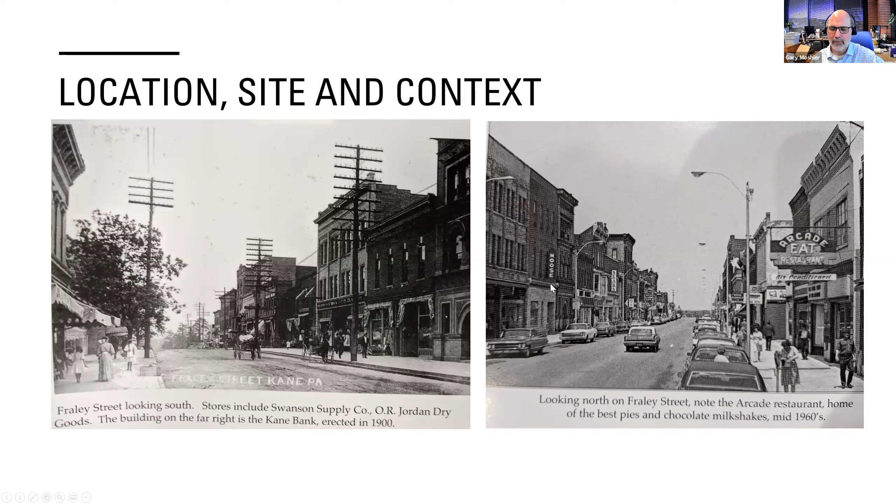And then this shot looking the other direction from the 60s. You can see at that point it's a 3-story building with kind of the nondescript facade. Already had the permastone added on and was the Moose Lodge at that point. And here is sort of an aerial shot.

Some of the existing conditions, I think Norm probably already showed you these. These were his photos. You can see the masonry was in pretty rough shape when we started. Also, the wood floor: the old structure had a bearing wall going up the center, so it was basically a 2-span structure with full 2x12, 3x12 joists spanning roughly 20 feet to the middle. It's roughly a 40-foot wide building.

Needless to say, that didn't quite meet our current codes for floor loading. So one of the things we did is we turned it into a 3-span building. We added 2 lines of columns and beams going front to back to shorten the spans up and replace damaged wood that occurred over the ages from people cutting things up, as well as water and other damages. So you can see here's what the inside of the building looked like early on.

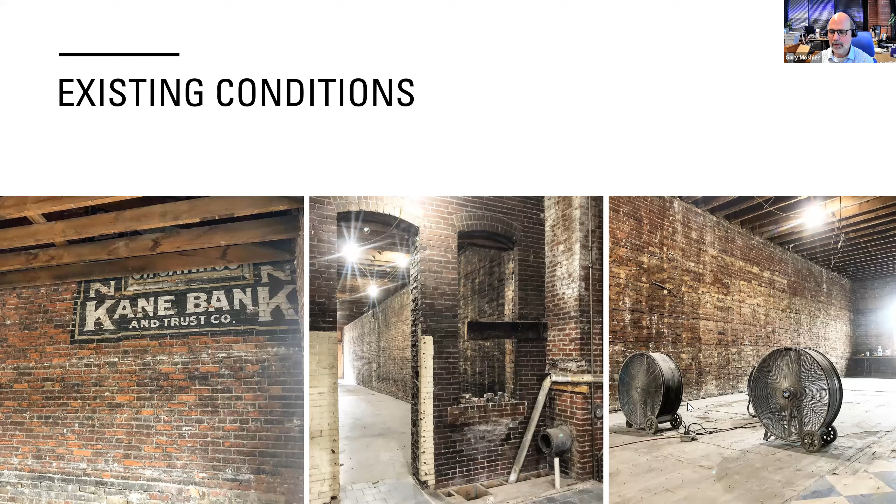This Kane Bank and Trust sign is up on the 3rd floor on the side of the building from before the 3rd floor was added. Down on the 1st floor, this was the back of the original building, and you can see they added about 20 feet behind. And then I think this other photo is on the 2nd floor, just showing some of the brick walls that were there on the party wall. Norm's going to get into some of that later as far as what we did with the brick walls.

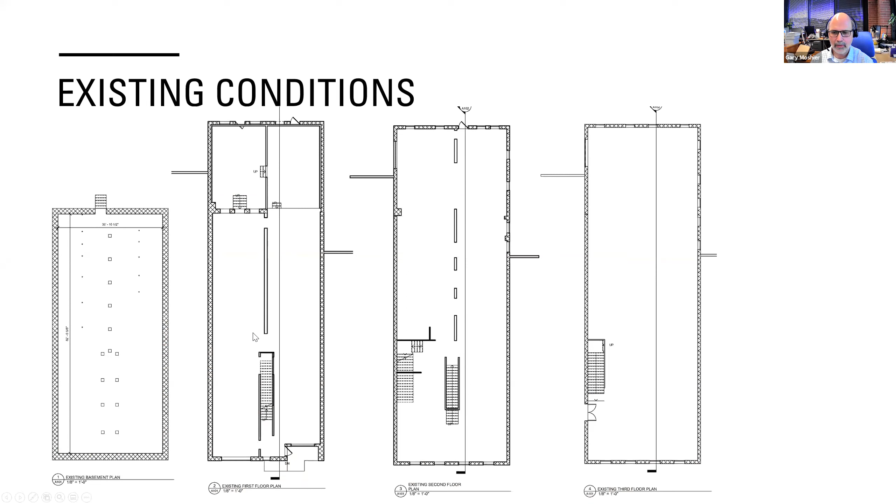So you can see here existing conditions. We have the party wall down the middle, stair going up the center, and the basement was just the original footprint. Fairly low basement. We're really just using it for some mechanical work, and we'll talk a bit more about the envelope strategy here in a bit. And you can see pretty straightforward sections and elevations in the existing.

So our design parameters for the new usage was basically to come in, do retail on the first floor, not a restaurant. We were fairly clear that we did not want to get into hoods and water usage and so forth with a restaurant. There's also enough other buildings with restaurants on Fraley Street. We didn't really need to get into that.

The second floor would be multi-tenant office space. And the third floor would be a conference room, classrooms, essentially operated by West Penn Power Sustainable Energy Fund for the community benefit. So it becomes a nice big meeting space since we have nice big clear spans.

Rest of the mission statement, we want to be a good neighbor. We want to set the example, as they were talking in the video. We want to demonstrate how to do this and what can be done in transforming the market. We wanted to share an elevator and a stair with the building to the south. We call the Laughing Owl Press. That's the name of the business that's in there. They did not have an elevator and they were short a stair to be able to use their floor plate.

So we figured if we could double up, use some of the sliver building ideas that have been pioneered here in Pittsburgh and sort of take those up there. So we've been working with a local code administrator to do the administrative variances to be able to do that. We wanted to use local and regional materials. We also wanted to salvage and reuse whatever we could.

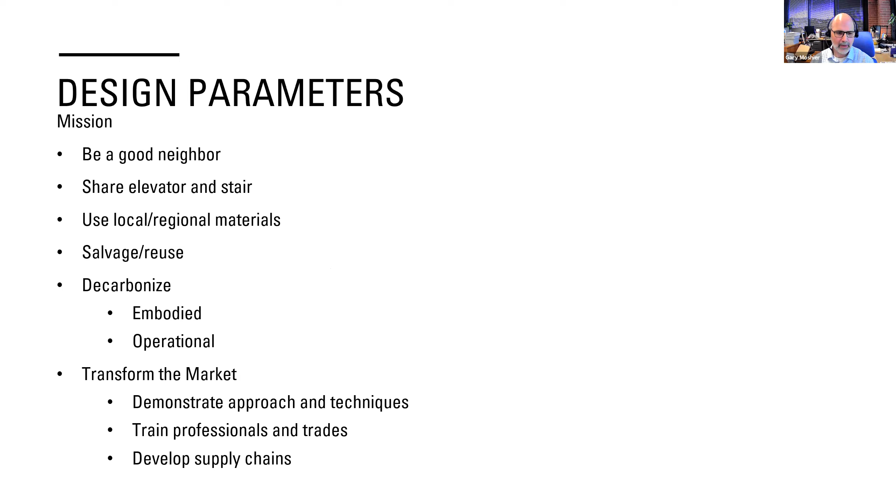Generally wanted to decarbonize through both using the embodied energy of the existing building as well as reducing our operational energy usage. And then also transform the market. We wanted to demonstrate the passive house approach, passive house techniques. We wanted to train the professionals in the trades up in that area and also develop some of the supply chains for the materials.

And further, we wanted to follow the PA Wilds design guide. As Mayor Brandy was saying, it's part of the PA Wilds, and they do have a design guide to help promote renovation and redevelopment of the downtowns that are in the PA Wilds area. And essentially the parts that we're working with is using the context of massing, materials and historic imagery, and then also use of local materials.

Joel is a geologist by training and pretty much mandated from the get-go that we use stone in some big way. So we're using stone actually from Russell Quarry in Grampian. And then to maximize daylight and views, since we are a sliver building east-west, the building's 40 feet wide and about 120 feet deep. And so therefore trying to get the daylight into the narrow ends is one of our key goals here.

As far as the passive house, at very minimum, we were tasked with hitting the passive house EnerPHit performance. And these are the parameters for that: 1 air change per hour at 50 pascals, 9.75 kBTUs per square foot per year space heating, 4.75 kBTUs per square foot per year for cooling.

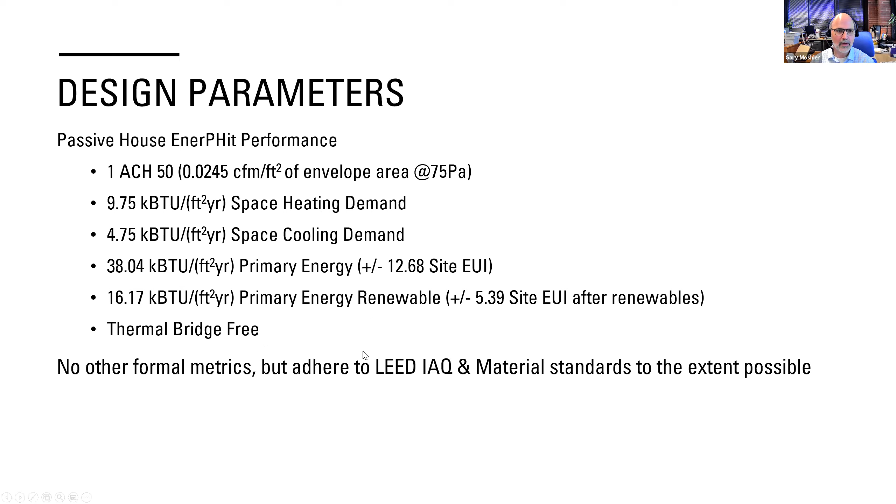We didn't really have any other formal metrics or systems that we're going after. We talked about doing possibly LEED, possibly WELL. We're sort of cherry picking various aspects of those. Generally, we're adhering with the LEED IAQ and material standards to the extent that we can, just to have a good, healthy building and to reuse the building, reuse materials, and use local materials.

Timeline started back in June of '19 when they bought the building. They spent the first couple of months working with InScale to document the building, develop some conceptual designs, sort of figure out what direction they wanted to go.

And then in October of 2019, the board, headed by Rob Hoskin at the time, decided to go for a passive house, and they engaged us and Envinity to help them get there. We started our PHPP modeling towards the end of '19. We basically set a deadline for mid-April to get our core and shell CDs out.

And then, of course, the work from home order hit us just before our DD deadline. So we kind of did a shift in what we were doing. We were able to issue a masonry repair and stabilization package in May, and then full-ish core and shell documents were issued in June of 20.

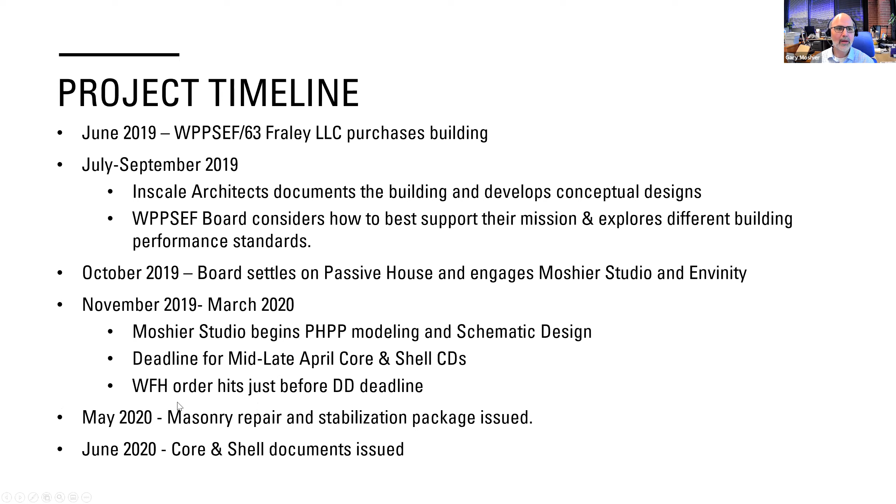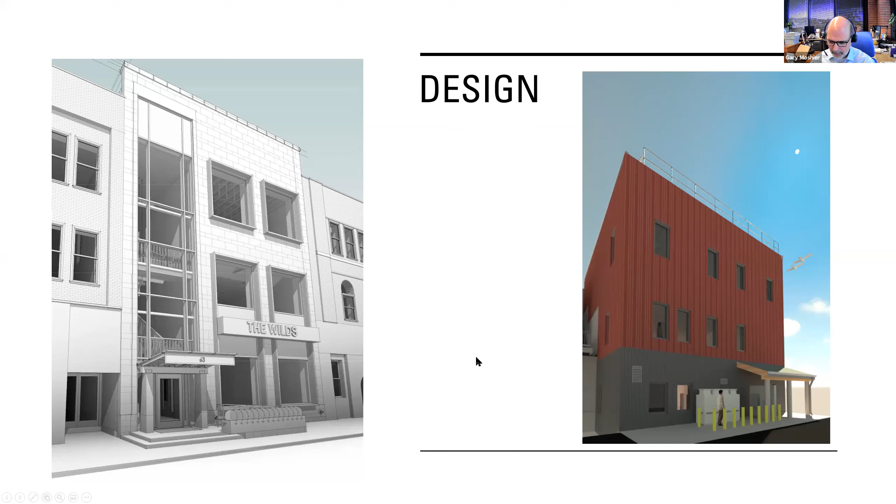Plan-wise, you can see here we're doing our core essentially along the south wall of the building. So the main entrance is here. We work back, elevator, mechanical, a shaft that goes all the way up through the building, stacked toilet rooms, some service space here. This varies between electrical, kitchenette, and storage on the various floors, and then our back stair here. The alley is about 3 feet higher than Fraley Street, so we had to make up that difference in the stair to get out the back.

You can see here that this is the Laughing Owl Press building. We're poking through the party wall to provide access to the stair and the elevator. And then what that does is that gives us a nice wide 24-foot by 115 swath of space. Get good daylight penetration from the east with the big windows. Pretty good daylight on the back. These were the existing openings, plus being on the west side, we were trying to not get huge openings on the back just to prevent some of the overheating. But on the front, we didn't feel too badly about bringing in some of the cooler morning light. So you can see that same idea just sort of goes all the way up through the building.

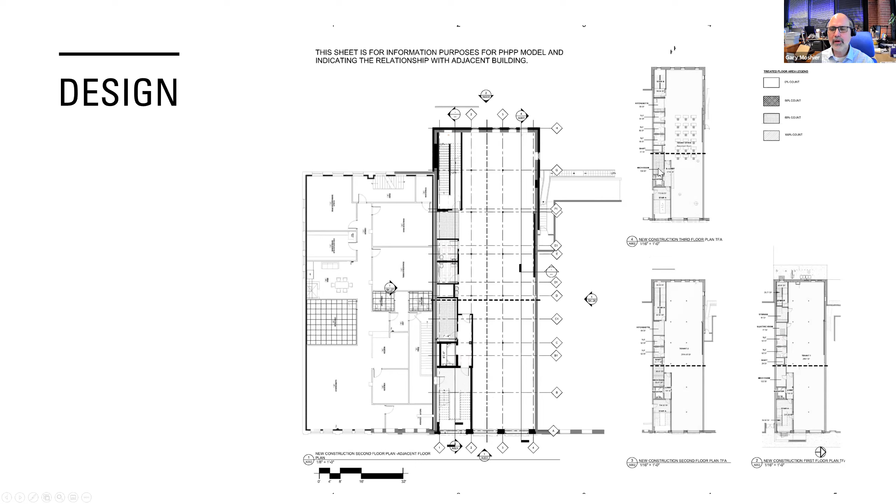Section wise, we peeled off the old roof, and Norm will get into some of the mechanics of that later. We had these 18-inch deep steel beams, basically 16 on center, that were marching back along the third floor, and we set up a series of trusses to give us a monoslope roof to the back. Got rid of an old bad drain system, so we're basically keeping all the water outside the building. We've got a huge gutter on the backside, and this gives us a nice high space.

The other thing that we've done by popping the roof up, we first of all got a parapet, so we had a little more distinction from the neighbors instead of having the same height. And by bringing our roof up, we were able to extend our parapet around and cap over top of the party wall, giving ourselves a good air barrier and also a good thermal bridge free. Actually, we have a negative thermal bridge, a negative psi value all along that edge. Our roof is our largest exposed exterior surface, so we really wanted to get it right, get it complete, and get those big long edges covered well.

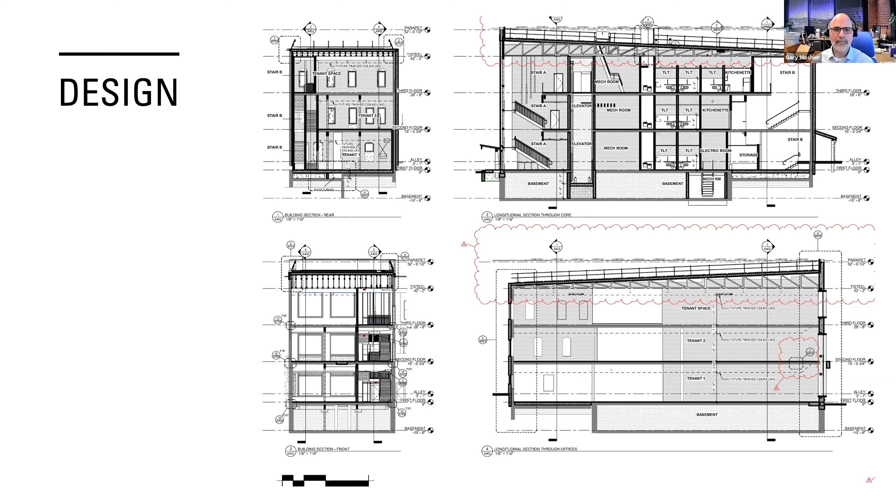And Norm's got some good photos he's going to share later with the construction. And then here's the renovation. Of course, here's our stone facade. We've got a little stone framework around the curtain wall, and then on the back side, we've got our ribbed metal cladding system.

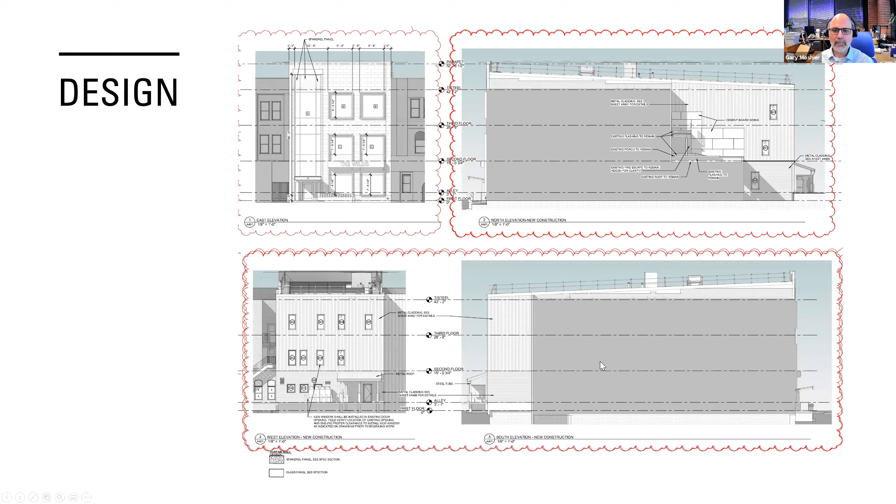The roof, in addition to being our largest surface, is also a power plant. We've got 90-some 430 watt PV panels planned for there. They may actually be closer to 500 by the time we actually get installed because the technology keeps advancing. We also have our energy recovery ventilator sitting on the roof, and we have a roof hatch so that we can come up and maintain everything and actually, you know, show it off a little bit if people want to venture up the ship's ladder to the roof.

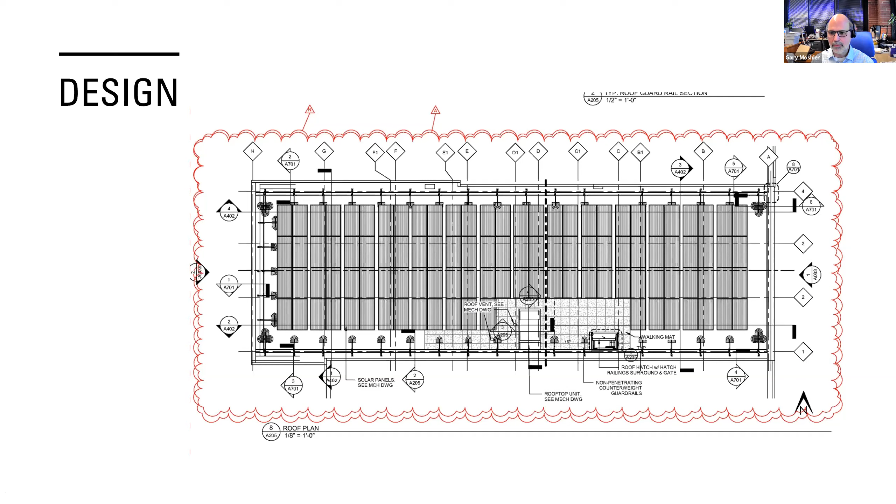So basic design elements, we had new roof structure that extends over the party walls. We used a fluid applied air barrier on the inside of the walls. And Norm's got some good photos of that he'll share with us. The new front wall is completely insulated. In addition to the 6 inches of continuous, we have about another foot of rock wool in various stud cavity spaces that make up the front wall and that work within the structural frame.

We have also on the interior, wherever we transition from party wall to clad wall, we've had to do some transitional areas of overlapping insulation on the inside and at the corners to get rid of our thermal bridges at the corners. And then at the bottom, the first floor, we've actually created a thermal envelope at the first floor level. So the basement is outside our treated floor area.

We've basically got on the floor surface, we've got the old wood decking, under that, blown in fiberglass insulation with an additional air barrier below that, and then we've got Durock on the bottom, providing a fire separation to the basement. As I said, the triple glazed curtain wall on the front is a Raico. On the back, we're using Ventana, made in Export, PA, triple glazed UPVC windows, and then we've got the PV on the roof.

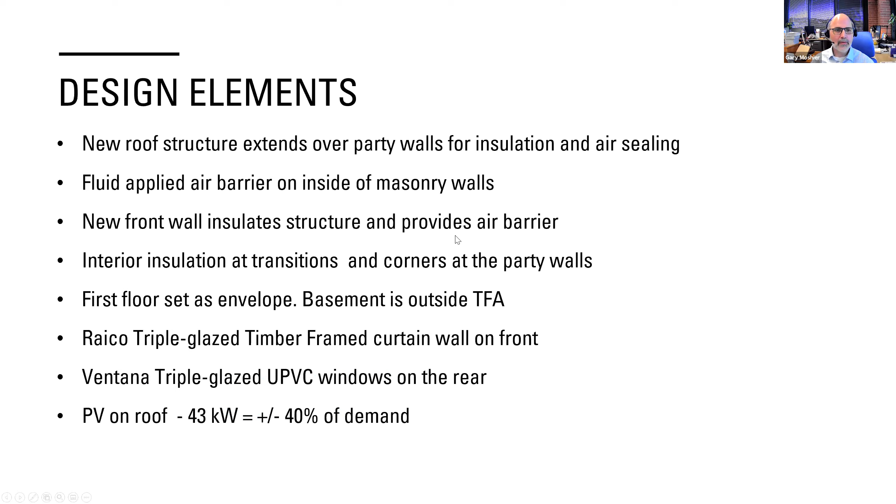So is that right? Yeah. Okay.

So where are we? In summary, right now against Passive House, our criteria is 9.51, but you can see we're at 3.16, which is actually under the 4.75 space heating demand for Passive House Classic. And similarly for the space cooling, our space cooling is 4.75, which is the same as Passive House Classic, and we're well under that. Our air tightness right now, we're carrying 1 air change per hour as our factor, just because we're allowed to under EnerPHit.

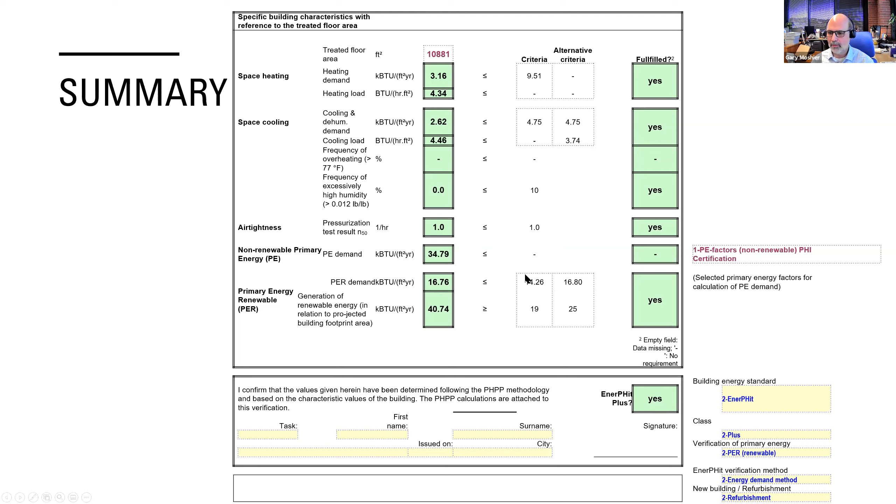But if we can get that under 0.6, which Norm will talk about a little bit later, then we're in good shape for Passive House Classic. And similarly, our primary energy goal is well in hand, and that number doesn't change much actually when we go to Passive House Classic. So we're actually in very good shape to hit true Passive House Classic and not just EnerPHit.

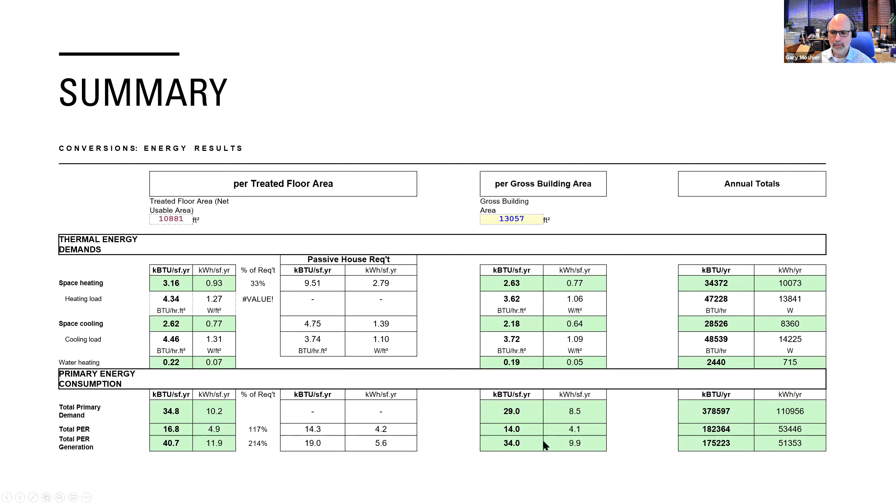So in summary, we're on track with our PHPP. We're on track for hitting Passive House Classic, or actually Passive House Plus, and we're still projecting substantial completion at least for the first tenant sometime this fall, and possibly for the full building after that. So I will turn it back over to Norm and let him pick up where he was.

All right, thanks, Gary. I'm gonna share. Okay, so we're back to where I left off briefly. I'm gonna get into a really quick review here of the existing conditions that we started with.

So, as Gary mentioned, we had approximately 12,000 square feet of floor space over this 3-story building, bounded on the north and south sides with shared party walls, and the east and west facades are and were 3-wythe brick. Wood floors, roof assemblies bearing mainly on the party walls, but with some point loads on the front and rear facade elevations.

And we talked a little bit about the sequence of the original construction and the challenges that presented for us. So we started out as a 2-story building. Our neighbors went up and they built 3-story buildings with their 3rd stories on top of our parapet walls. And then 15, 20 years later, our building came back, added a 3rd story, doing the same thing. They dropped these big 18-inch steel I-beams into the neighboring buildings and put a roof on it.

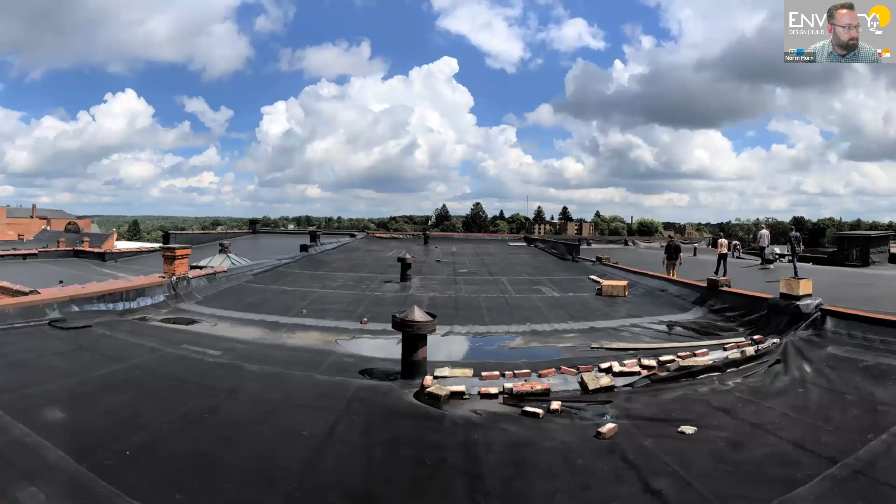As probably most of you remember, Pennsylvania closed construction for 9 weeks at the end of March last year. And other businesses were forced to learn how to work remotely with no advance notice. So things got difficult quickly. We started to reopen awkwardly in May, and by the time Gary's office had gotten core and shell drawings done, we got a permit issued, contracts lined up, materials secured, we had a really tight window to get this done, starting in August, and trying to get both of those assemblies completely replaced and dried in by mid-October, when snow is a very real possibility in this part of the state. So we came up with a way to work on these assemblies concurrently.

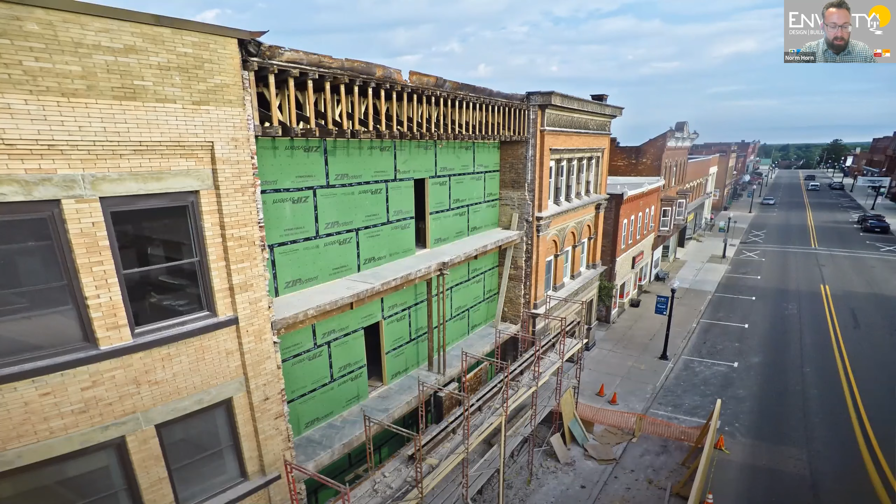Here you can see a small crew of masons dropped this facade in just a couple of days. And we had some temporary support and weather protection on the inside here. And once they got that down to the sidewalk, they just kept going and went into this 2-foot thick sandstone foundation wall and set new piers that our new facade structure would sit on.

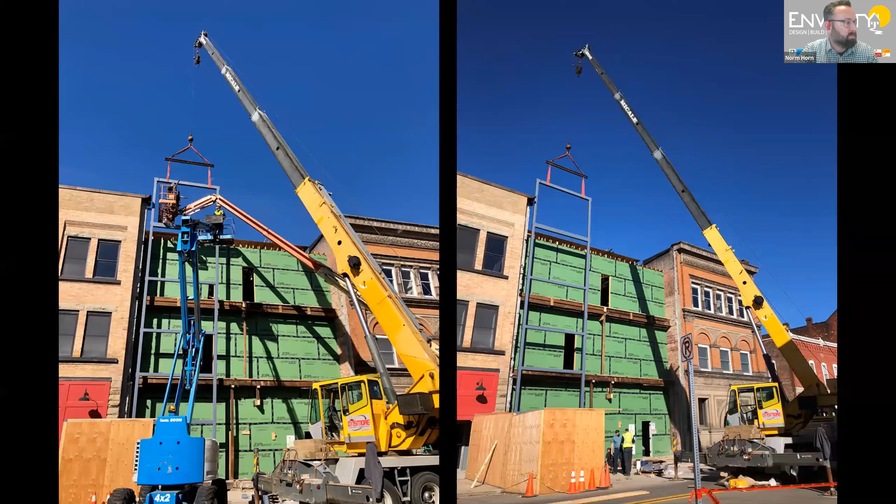So we used a local steel fab shop who really blew us all away with the level of detail and quality of work that they delivered, on top of having to navigate borough approvals and I don't know how many PennDOT permits to transport the steel, and then shut down Fraley Street, which is a state route and the main street through town. So we had the street shut down for a day and a half, and that allowed them to set these 2 58-foot towers. They did them in one piece, dropped them into place.

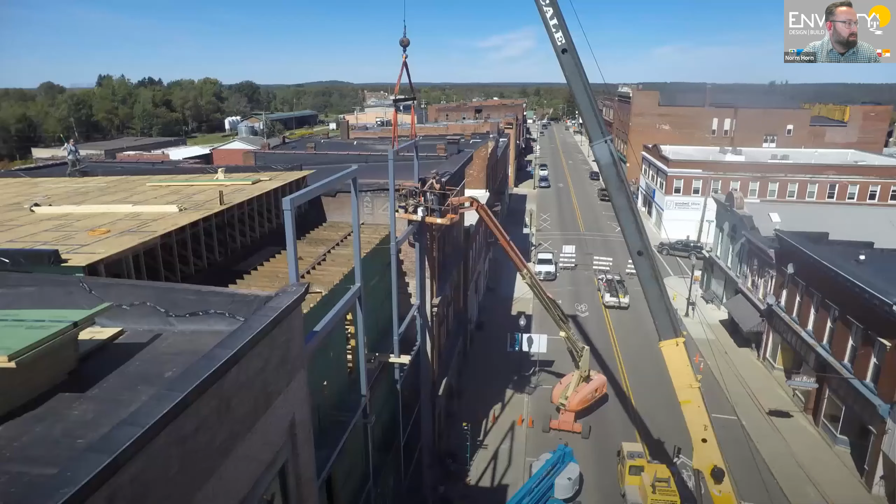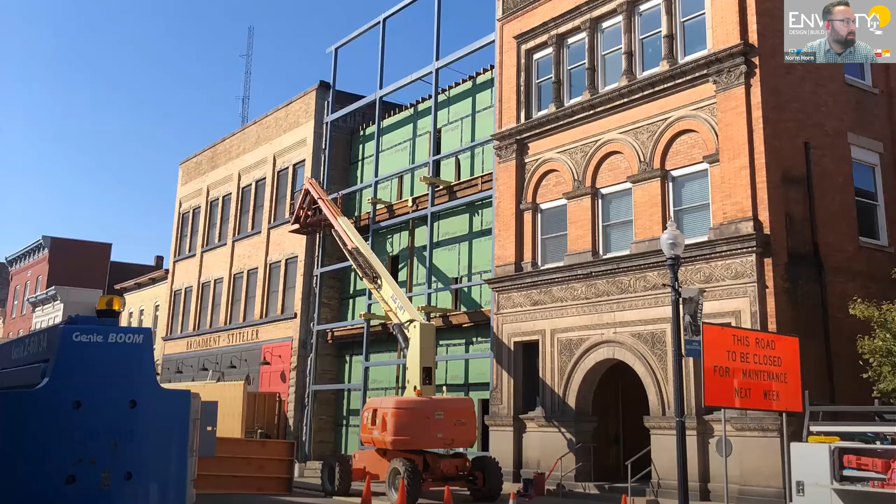You can see the second one going in, and then they connected them with a few beams right down the middle to complete that structure. Here it is at the end of the day. They had the whole thing up and largely tied into the neighboring buildings and tied into our building.

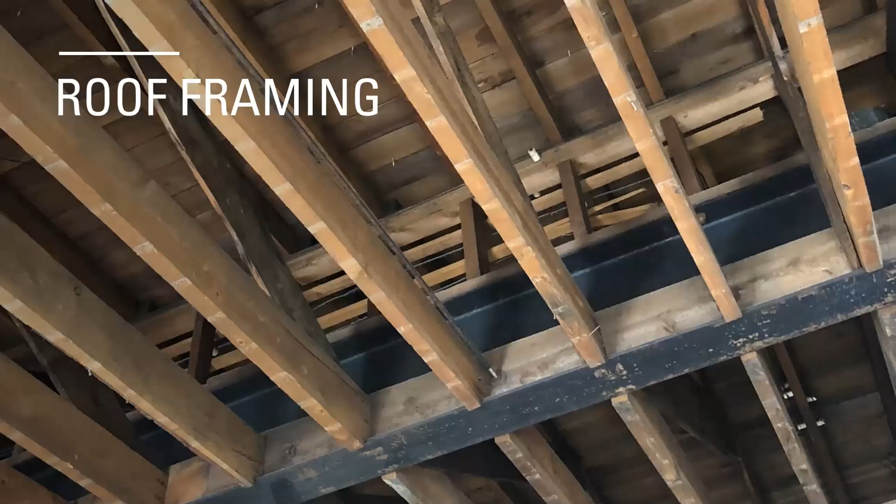So while that was being fabricated, the roof structure was being replaced section by section. The steel I-beams are roughly 16 feet on center. So that let us take out the roof in 16-foot chunks and just sort of march down the length of the building. As we said earlier, the 3rd floor was a pop-up addition supported with those beams. And the roof assembly and how it connects to the walls is where the discussion of air and thermal control layers really starts to get interesting.

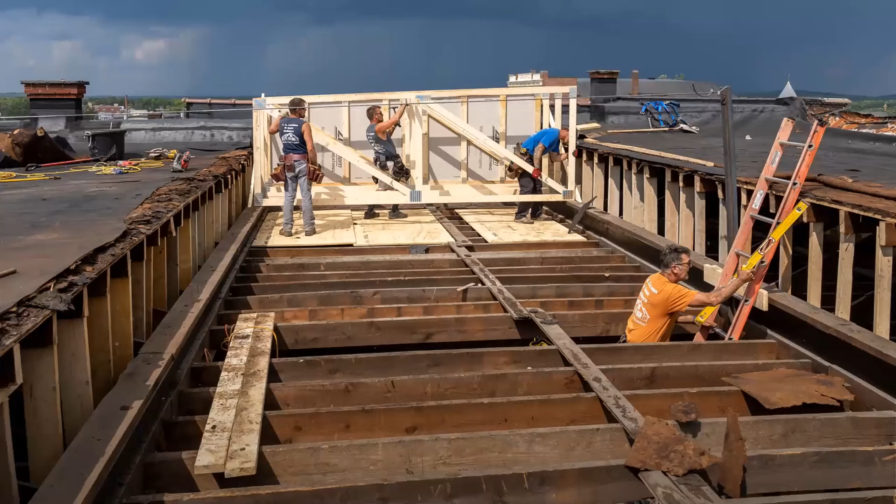We wanted to use the roof deck as the air barrier, and intended to keep as much, if not all, of our roof insulation outboard of that structure for solid continuous insulation. So we removed the rafters and the little stud walls on top of the beams and replaced them with open web trusses to span the roughly 14, 16 feet between. So here we are. We started one bay back from the front, and then took off the front section last.

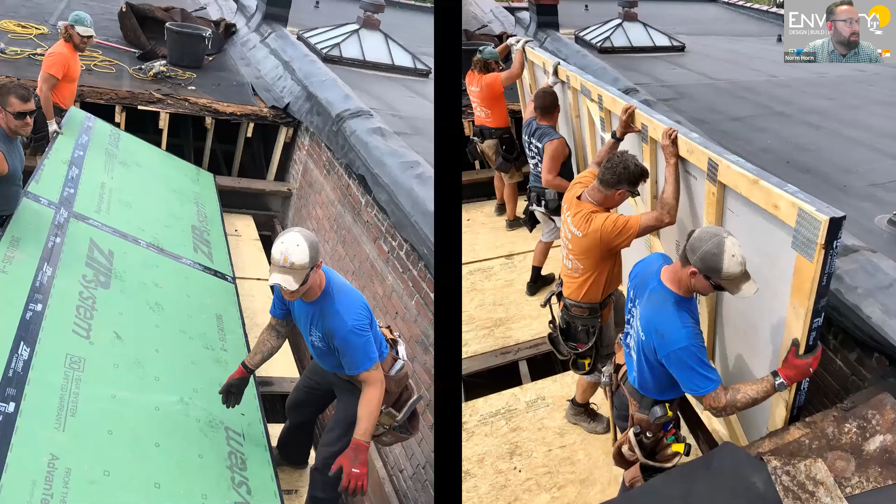So our gable end trusses were sheathed with ZIP R sheathing, which gave us an air barrier and a layer of R9 polyiso insulation bonded to that ZIP sheathing in one panel. And we taped the seams and the perimeter of each truss from the outside as they went in, as well as then taping them to each other. And that gave us a way to jump our air barrier from the outside around the parapet and down into the inside of the building. We connect that later when we pick up the air barrier with our inside masonry walls.

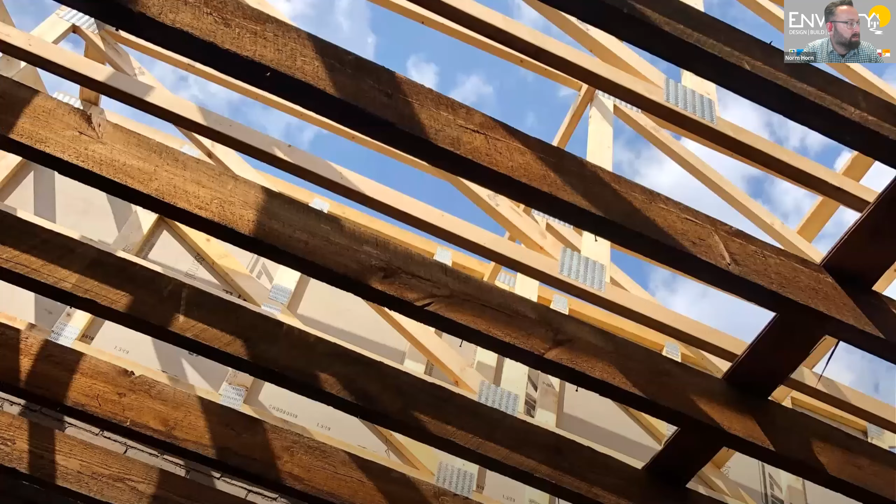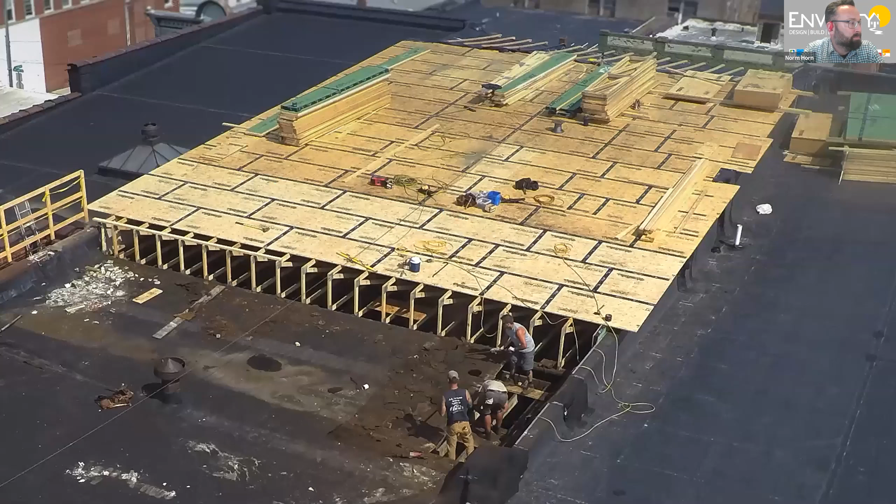So here we are after a fresh set of trusses on top of these 2x8s that basically just held up a plaster ceiling. And these are the ones that we salvaged, several hundred of these. Hopefully we can use them in the rebuilt structure. So here we are after probably about the first 4 sections, looking from the back to the front of the building. And usually it was about a day, day and a half to get a section torn off, and then about 3 or 4 hours to set the new trusses.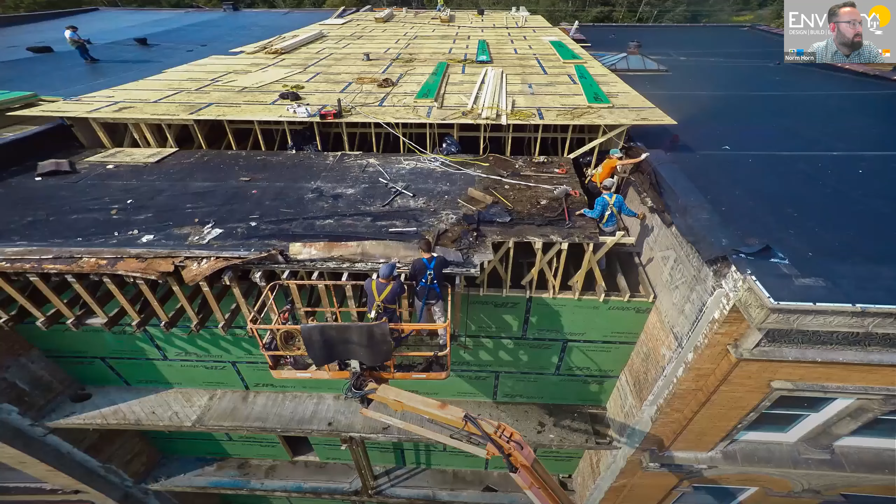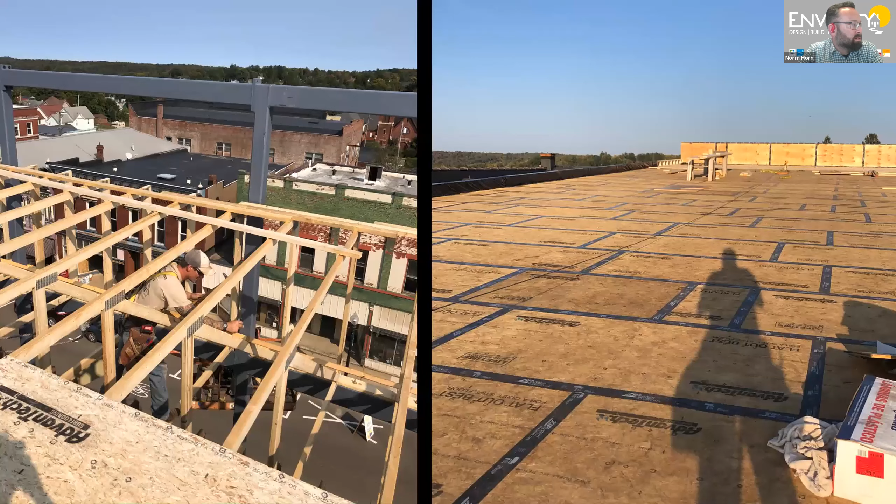And here we are. This is the day right before we set that steel structure. We had a good weather window and an opportunity to take this last bit off and have it ready for eventually tying into the steel. And then here we are with a complete roof deck and air barrier. So once that was done, we were able to turn our attention to roof insulation and the membrane.

So we went with a white TPO membrane with the thought that the extra reflectivity would benefit our solar array, which is currently scheduled to be 102 435-watt LG bifacial panels. Those are modeled to generate about 51,000 kilowatt hours per year. And Gary was able to work the PHPP energy model to give us a continuous 8-inch layer of polyiso across the roof deck without needing any additional insulation inside the building.

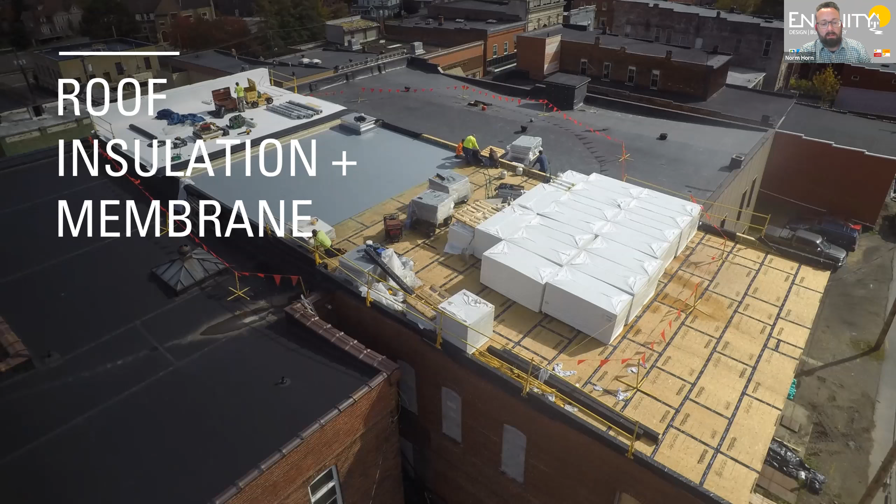These are some of my favorite construction nerd photos that really show how this roof assembly went together. So each layer, from the air vapor barrier, two layers of 4-inch polyiso, some tapered polyiso at the edge, a cover board, everything we adhered with CAV-GRIP instead of using any mechanical penetrations, because we really needed to avoid that if we're using the roof as the air barrier.

It's kind of hard to see in some of these photos, but we actually flew the roof deck long over the parapet walls. See, this shows up in the CD set here. And what that allowed us to do was turn several layers of insulation down on top of the parapets and create a continuous thermal lid over the building.

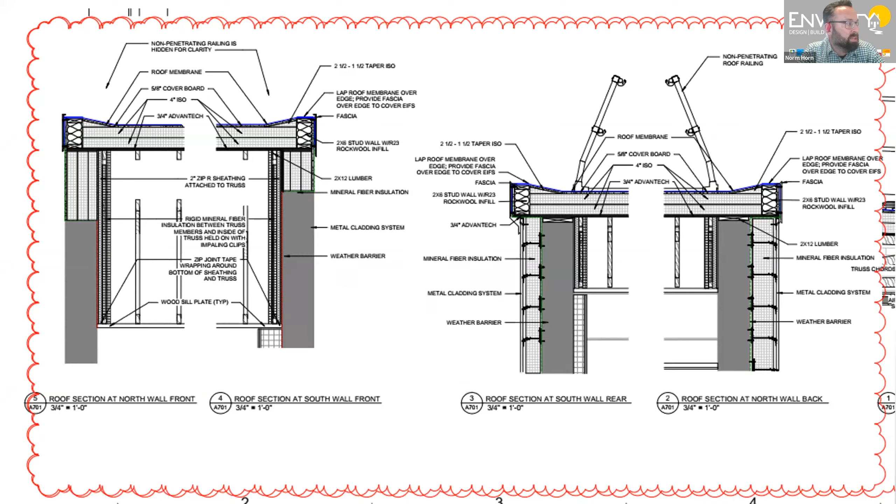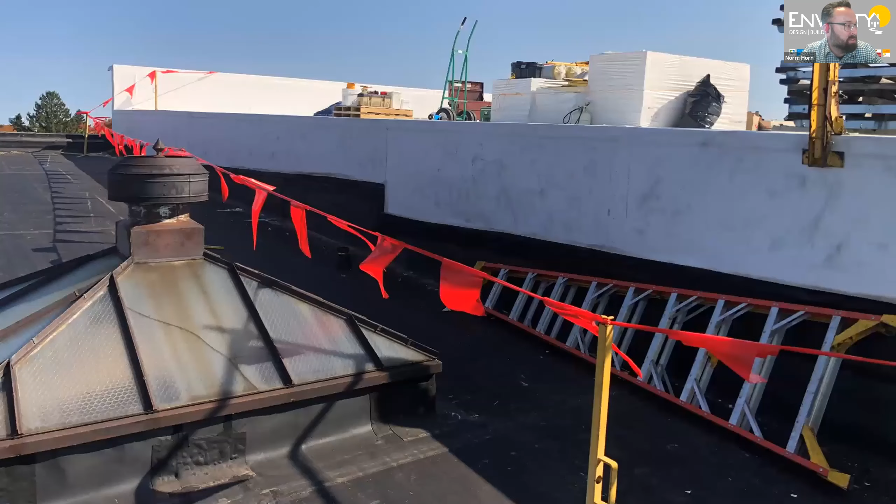There's some of our 4-inch layers of polyiso stacked up in those wedge-shaped spaces that went down the side of our building to the neighbors. And this gave us a really nice, clean shingle lap transition over our neighbors' buildings, and something I think will easily outlive any of us on the project team, which is exactly what you want in a low slope roof.

So moving on to tying this all together, we did hit our mid-October deadline. We beat the snow, so that was a win right there. Because those assemblies accounted for roughly 40% of the total envelope area, they were important to get done in good weather under good conditions.

So as Gary touched on here, the strategy for the air barrier is very simple. We're using the roof deck, the first floor deck, the steel framed front wall, and the existing masonry party walls as our air barrier. We don't have any large areas of air barrier or smart vapor control sheet membranes. We did use a lot of fluid applied smart vapor control and air barrier product. That was the Pro Clima Visconn fluid on the inside.

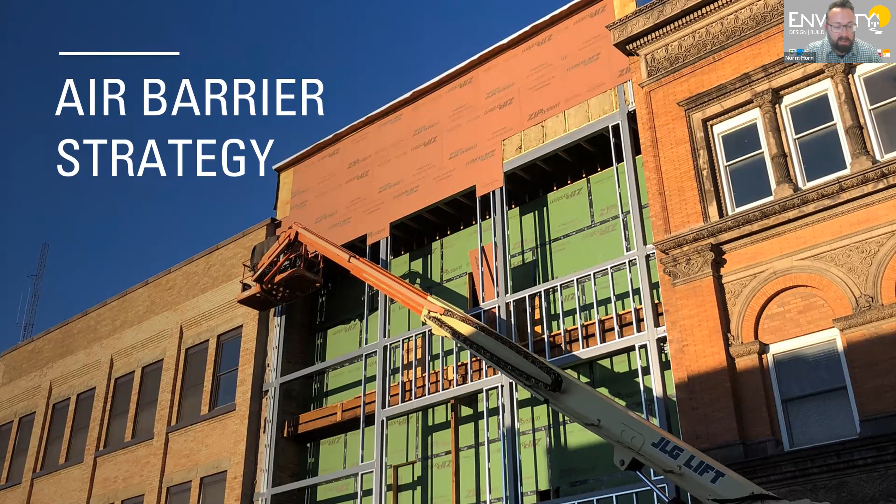And with anything this large, these large open areas are relatively easy. But the challenge and the money is really in the corners and the intersections. So starting with the easier ones is the roof deck. I mean, this is just putting down sheets of AdvanTech and taping the seams. Like I said, we ran this long, we taped out over the edge, connected that to those ZIP sheathed gable roof trusses.

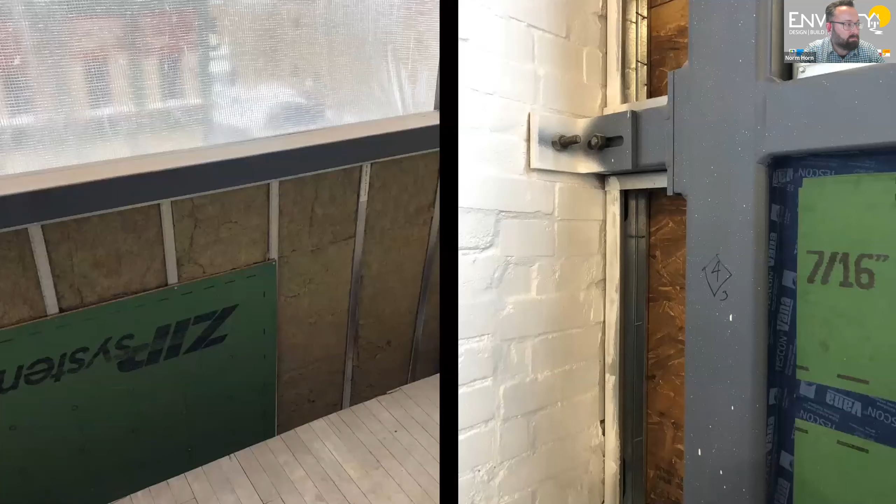We insulated with rock wool and light gauge steel studs inside our facade structure, skinned the inside with 7/16 ZIP, and taped all those seams, taped over any fastener holes, taped or did fluid on all these brackets that attach back into the neighboring buildings.

And the biggest and most daunting challenge was the masonry party walls. It's just the sheer volume that we had to address here. I mean, we have over 12, 13,000 square feet of 3 and 4 wythe brick walls to air seal. And of that space, we had approximately 400 2x8 and 2x12 joist pockets, numerous abandoned chimneys, flues, legacy mechanical penetrations, and then just thousands and thousands of linear feet of these nailer strips that happened every 7, 8, 9 courses

on all 3 floors. So, an important part of the program for the owners was the desire to show as much of the interior brick as possible in the finished spaces. So even if it had to be coated with an air barrier product and then painted, we really had to be conscious of what we could get away with, what was the appropriate level of intervention to get us an air barrier and meet our aesthetic goals.

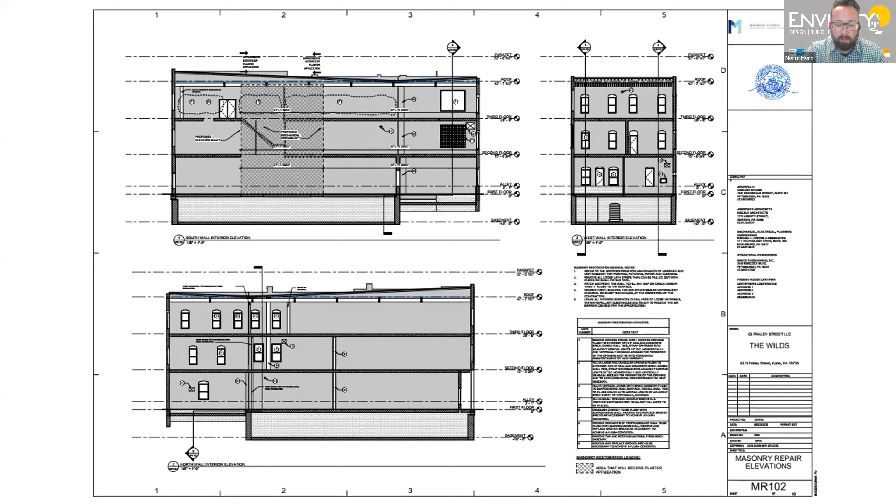So Gary's office developed this masonry repair document early on, which was invaluable for getting us a quick post-COVID shutdown restart, getting some masons in there, and getting a head start on parging, pointing, infilling windows that we were abandoning, and opening up windows that we needed to make new openings for.

So, of this list of challenges in the masonry walls, pocketed floor joists are high on the list of problems to solve. We spent a lot of time going through the space joist by joist, cleaning up old mortar blobs, pulling nails, tucking and parging around each penetration.

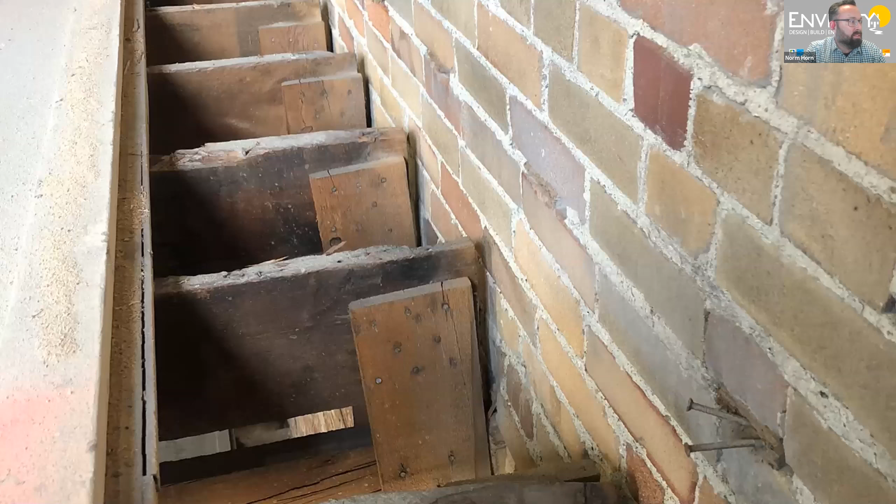So with the unique sequence of original construction, our second floor ceiling, third floor, it used to be the roof. So it's framed with like a double 2x8 cockloft assembly where only the bottom members were pocketed into the masonry, and then the upper members were stood off with 1x6s, and they stopped short of the party walls.

So our masons spent a lot of time and effort parging the perimeters of the floor assemblies to make sure that we were airtight in what was really the most vulnerable area here, and an area that we'd be covering up later. So we needed to make sure that it was right and that we weren't burying any problems that we wouldn't be able to chase down in the future.

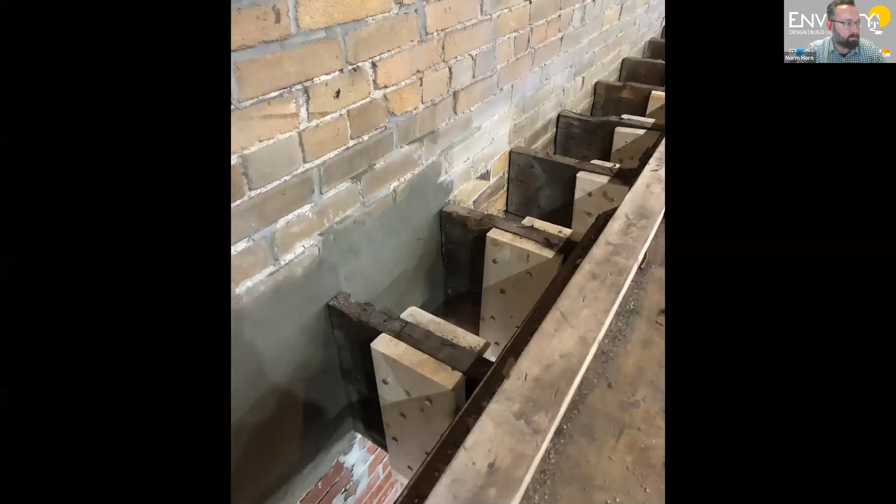Jump back here. After a few bays of trying to parge this condition, we realized that a far more humane and sensible approach was to cut back that top joist and stand that off with some new structure and give the guys some room to get a trowel full of mud back in there and get a much better job. There we can see getting started with that.

Something else that we needed to clean up was the collateral damage of taking the facade down. So here's the condition to each neighboring building, sort of a before on one side and after on the other. And this picture on the left, I really like this because it shows how much open space there is in what's considered by a lot of people just a solid masonry wall. There's no way that air is going to get through there, but there's quite a bit of room for air

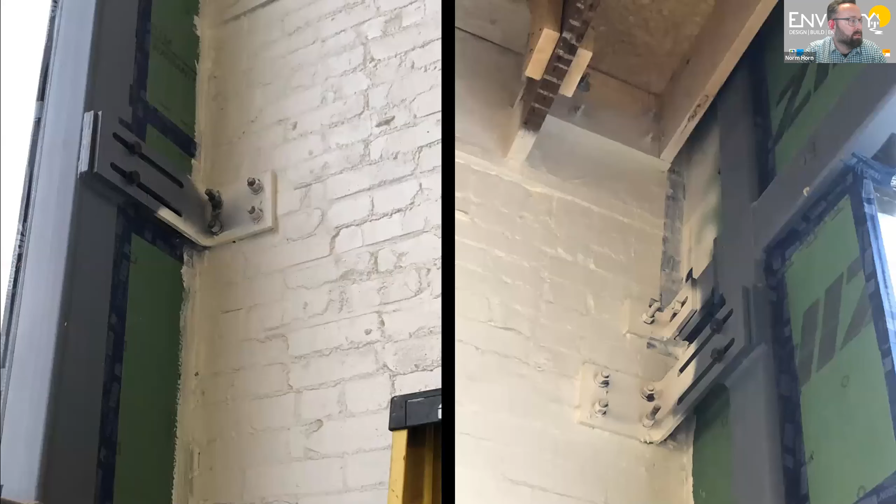to get through there. So again, the guys spent a good bit of time working their way down, parging over all these busted up brick ends and tightening up to the neighbors, which really paid off in the end when we were able to make some pretty clean and solid transitions around the brackets here at the steel up front and not have air leakage problems.

So one of the big things that we really had to figure out here was determining how much is enough effort, and getting everyone trained up to taking on sort of a new task where it was a judgment call as to when do you stop, when's good enough, right?

So we had a lot of places like the nailer strips that I showed earlier that were pretty straightforward and easy. There were just a lot of them, but it's a bed joint, pretty easy. Likewise, we had an untold number of pinholes, hairline cracks, little things that we could pretty easily rely on our fluid applied product to fill. But we also had countless places that fell in the middle, too big for one approach, too small for the other.

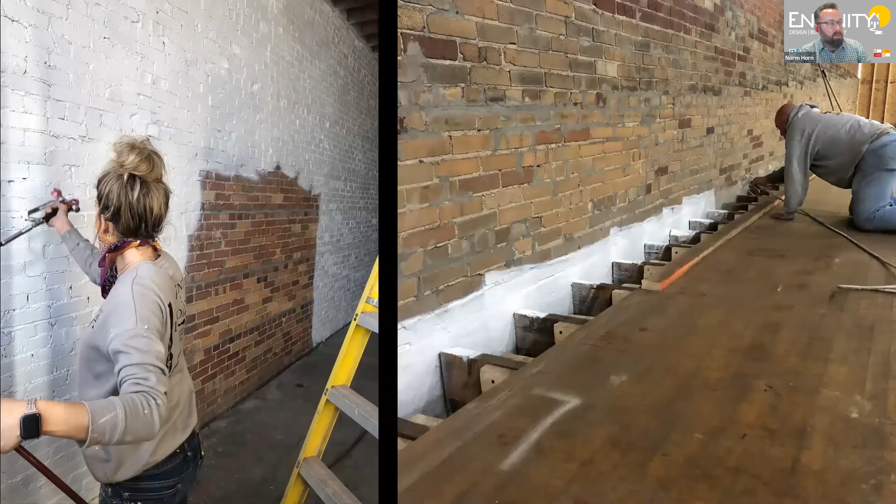And in the end, what it boiled down to was just taking a methodical approach to a big project, paying close attention to details, keeping track of what's been done and what hasn't been done, and just keeping your eye on the end goal. So when it came to the fluid applied air barrier products, we found that the best people for this task were the paint crew, since they already had the equipment, they're used to being meticulous about prep, finish quality, and coverage, which are all important for this application.

They didn't know anything about building science or air barriers, and to a certain extent, they don't need to know a lot, but they've got a new exposure to a new skill, new products, and doing something a little bit different than what they've been doing.

Hey, Norm. Yes. We're gonna have to wrap up soon. Okay, sorry. How much time do we have? Not much. A couple minutes, maybe.

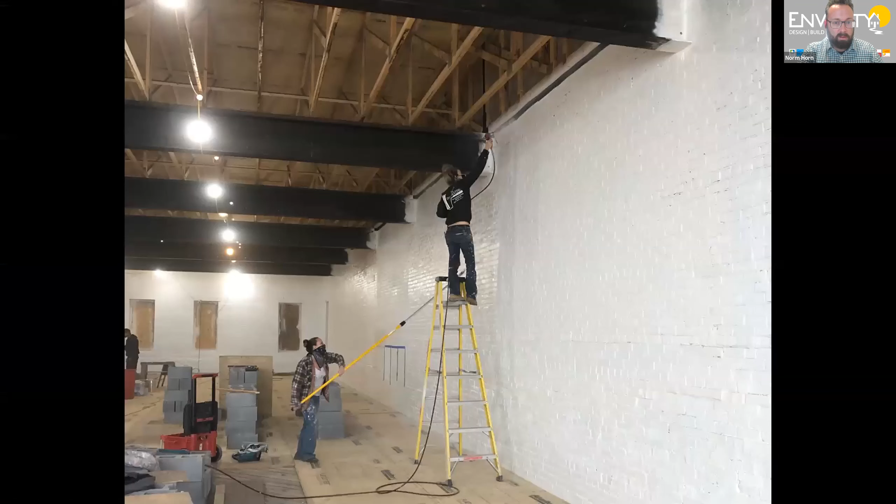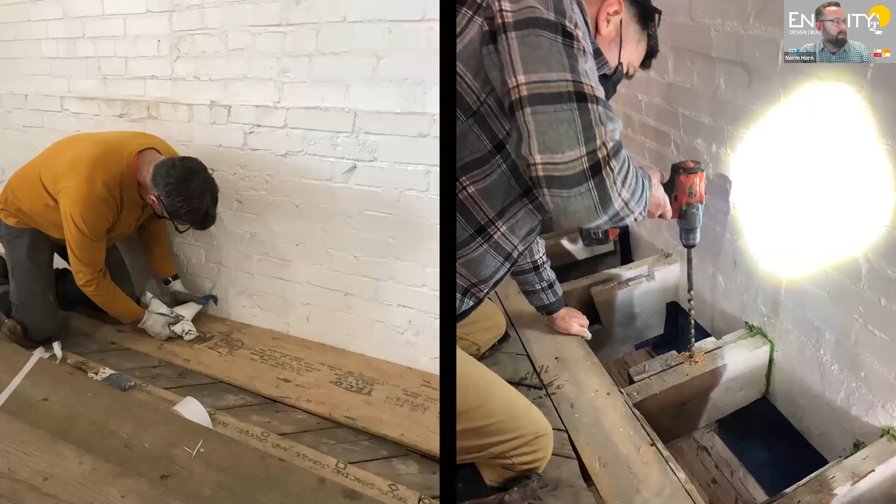Okay. All right. So after we cleaned, repointed, cleaned again, sprayed, and back rolled 2 coats of Viscon, touched up any last problems, we were actually able to get to our first coat of finished paint. Here they are with the fluid applied, and then here's our lead carpenter going through with a grout bag, checking the last bits that we couldn't get with the fluid.

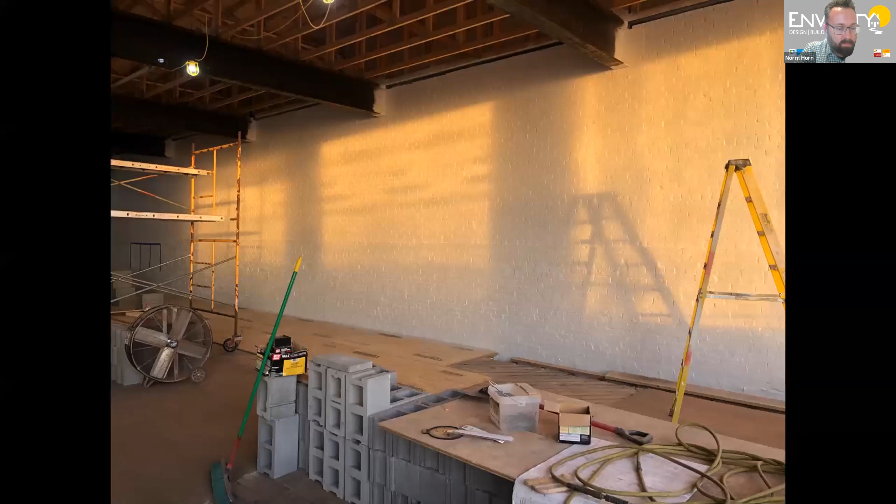We'll jump ahead real quick here to where we're at now. Just kind of talk about the air tightness end of things, where Gary summarized the thermal, and we've been able to start doing some blower door tests, trying to get things slightly tighter than they had been. We were able to just go over our window openings with plastic to get our building to pressure, and using just simple tools like I regularly use this little FLIR dongle for iPhone or iPad to detect air leaks.

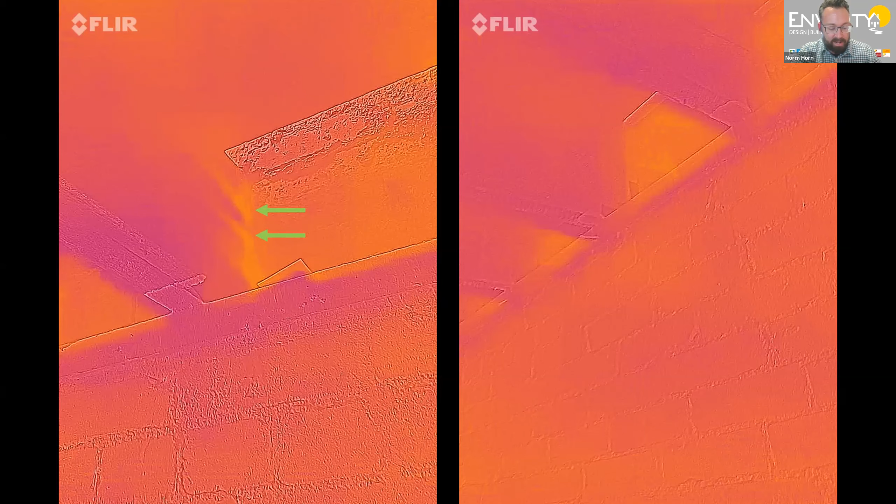That's not working so well now because the weather's warming up. It works better when you have maybe a 20-degree delta T from inside to outside. There's also just very simple things with running the blower door and using a smoke pen to trace leaks, or putting your hand over suspicious areas to see if you feel air.

So last year when we started this, the PHPP had roughly settled to where it was going to be, and we figured that our estimated leakage area, or free open space that we were allowed to have to still meet that 1 ACH50 threshold for EnerPHit, was about 290 square inches for a building volume of about 128,000 cubic feet. So that works out to a cumulative open area of about 3 sheets of 8.5 by 11 paper.

And this is my first all masonry building to air seal, so I didn't really have a good frame of reference for how difficult 1 ACH50 would be to hit in this situation. And when our certifier mentioned he thought that 0.3 was going to be easily achievable, I was pretty nervous about that. But turns out just having plastic over the windows and good attention to detail to big areas actually works out pretty well.

And we're currently sitting at over the threshold, but we still have over 1,000 square feet of envelope area that's just plastic. So I'm confident that we're going to get well below our 1 ACH50 threshold here in the next couple of weeks as all of our windows and curtain wall goes in. And I will cut it off there, and hopefully we have a few minutes left for some questions and comments.